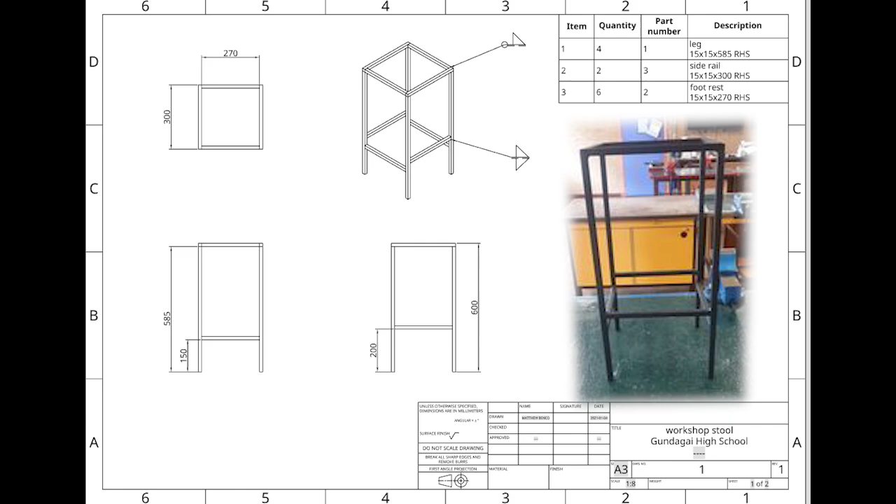The first thing you need to do is come over here to create, then hit document. You want to name this stool. This is the third time I've done this, so I'm going to make it stool 3.

So this is our drawing window, where we're going to create our parts to make the stool. The stool only has 3 parts: a leg, a footrest, and a side rail. We're going to start off doing the leg.

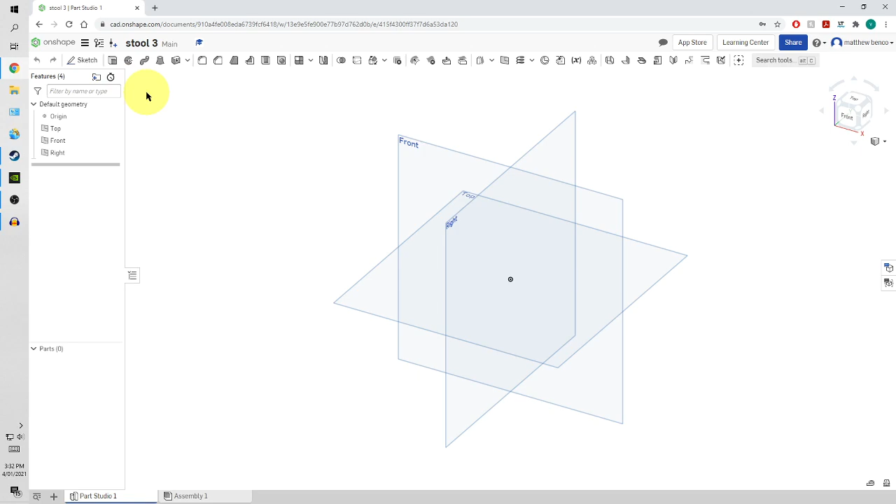We're going to go up here to sketch, then click on top, and look down on top like this. We go over here and use a center point rectangle, starting from the origin right here in the middle and drawing it out like this.

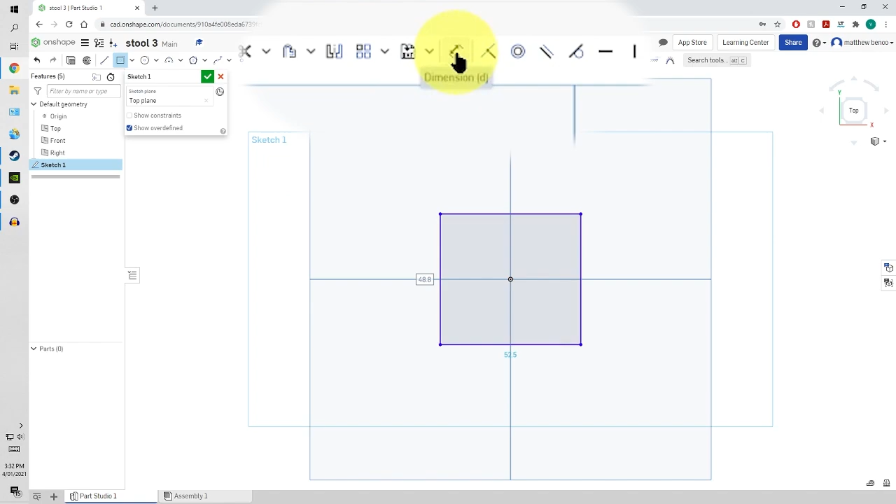We're going to go up here to dimensions, click, then click again. We're using 15 by 15 RHS, so we type 15 there. Click, click, 15 again. You can see how everything here has turned black, meaning it's all in the correct position and dimensioned back to this center point. Make sure everything is black with no blue sides. Click the big green tick and we have a square here.

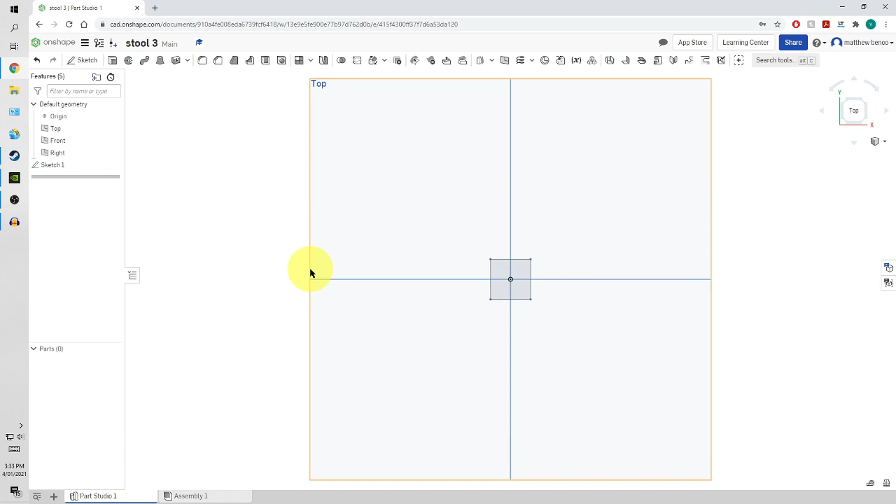Now that square is just 2D, like drawing a square on a piece of paper. But now we need to draw it out so it's an actual 3D leg. We come over here to extrude, then click on the part we want to extrude, and you can see it's starting to stick out a bit.

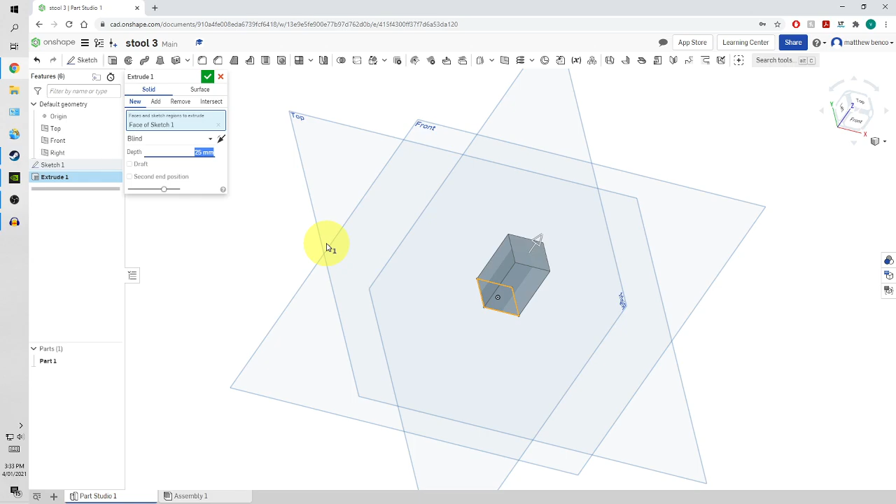Now if we look at our plans, we can see the overall size of our workshop stool is 600 mil. 600, take away 15 for the top rails, is 585. So that's how long we want our leg to be. See, it's nice and big.

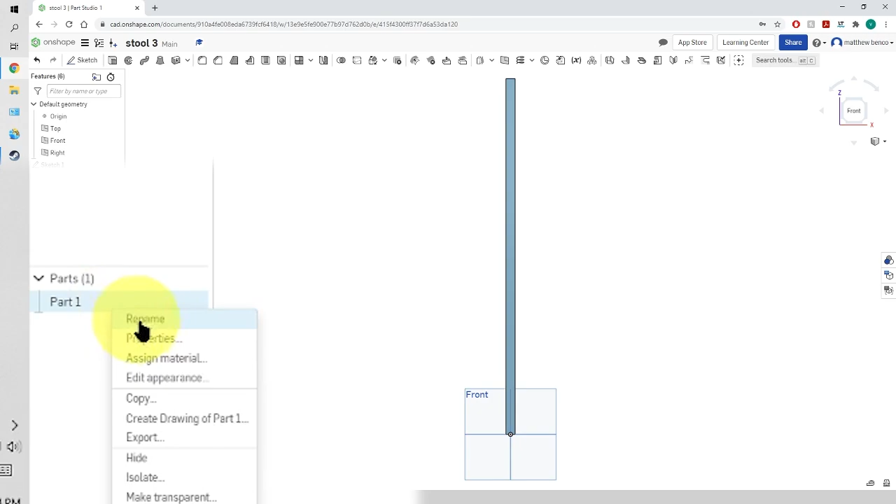We're going to come over here to part 1, over here in the parts menu, right click it, then click on properties. This little menu comes up, and we're going to call it a leg. In the description, we're also going to call it a leg, and we're also going to put in here 15x15x585 RHS. That'll help us out later on when we go do workshop drawings.

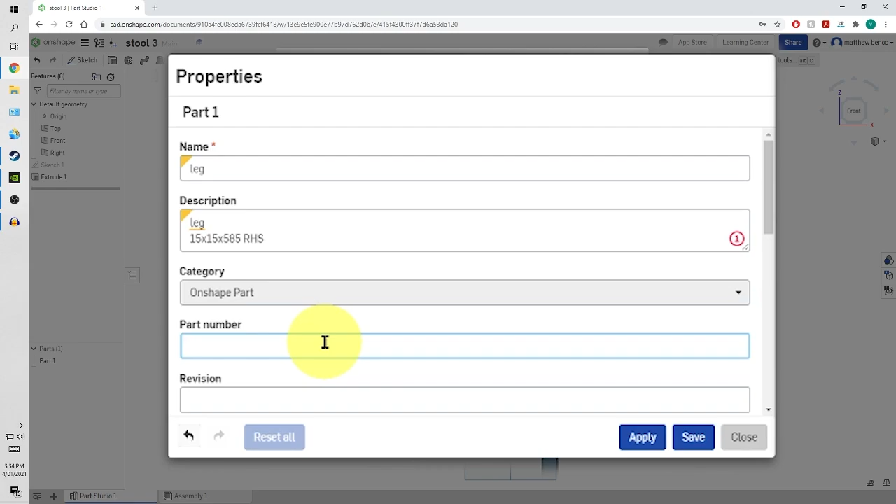And this is part number 1, so we're going to save that. You can see over here in the parts menu that it's renamed this to leg. Now I'm going to click on this little eye icon here, and that's going to hide that leg away so we don't see it anymore.

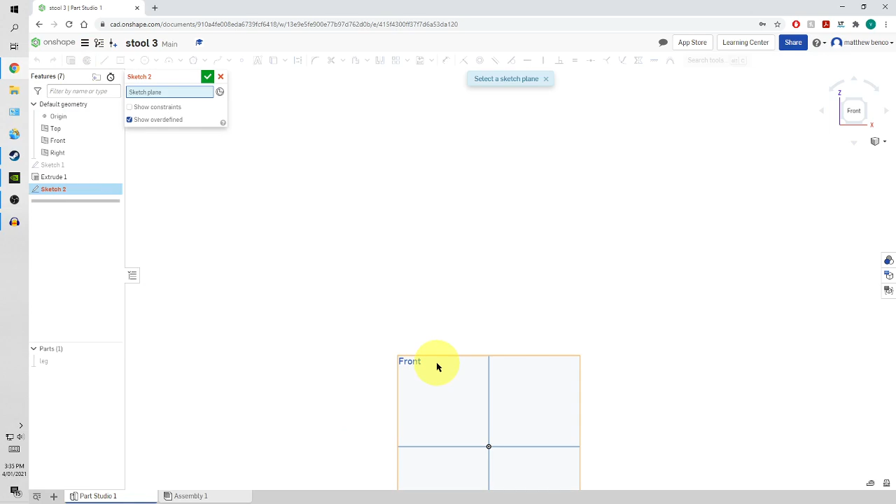Now what I'm going to do is a second sketch. I'm going to go to sketch, and click on front this time instead of top. I'm going to click over here, make sure we're focused in here, and again go to center point rectangle, click on the origin, and bring it out like this. Dimension, click, click, 15, click, click, 15.

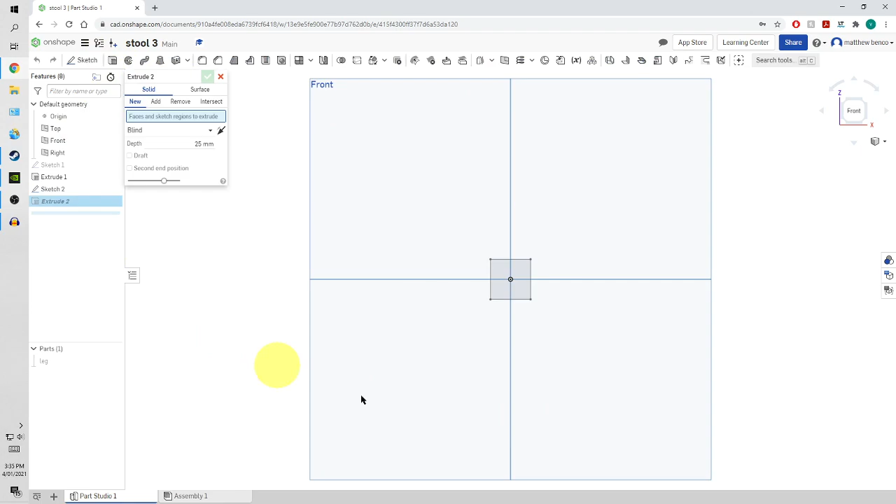We're going to extrude that now, and this is going to be our leg rest. If we look at our plans, the width of our workshop stool is 300, which means this leg rest needs to be 270 because it has 2 lengths of RHS on each side that are both 15 by 15, so that makes 30. So now we have a piece coming out that is 270 long.

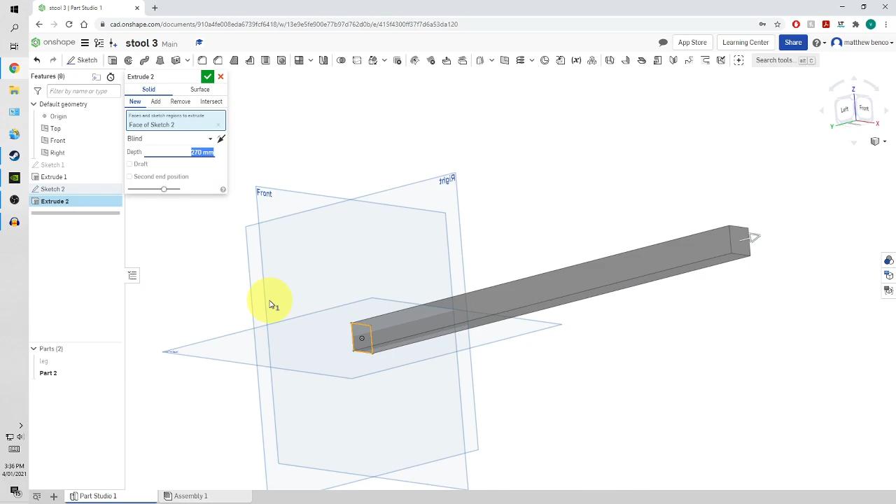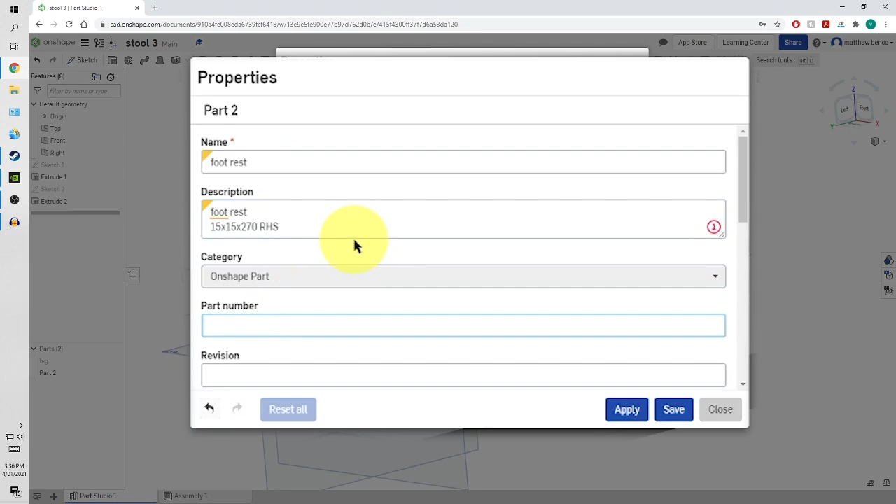We're going to hit that tick, go once again down here to properties, and name it footrest. We're going to put footrest in there as well. It's going to be 15 times 15 times 270 RHS. Part number 2. Save.

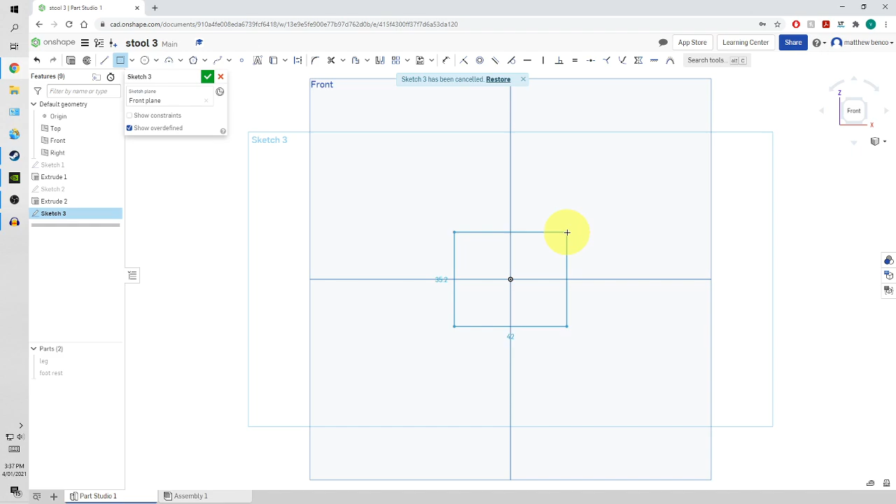We're going to click that little eye icon again and it's going to go away. We're going to go to sketch and go front, and then click on this thing here so we know it's focused on the front. Once again we're going to use the center point rectangle. Click, click, 15 by 15.

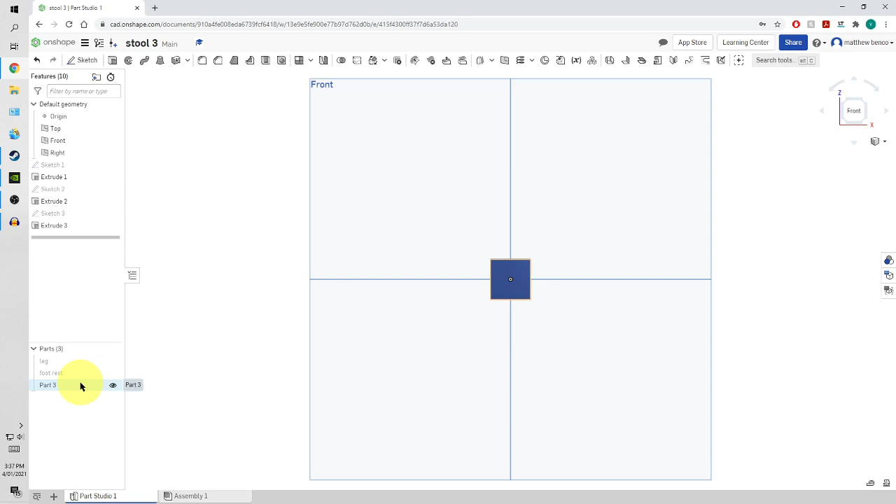And this one we're going to extrude by 300. Go over here, go to properties again, call it side rail, side rail again, 15 by 15 by 300 RHS, part number 3. And that's all we need to do for this section here.

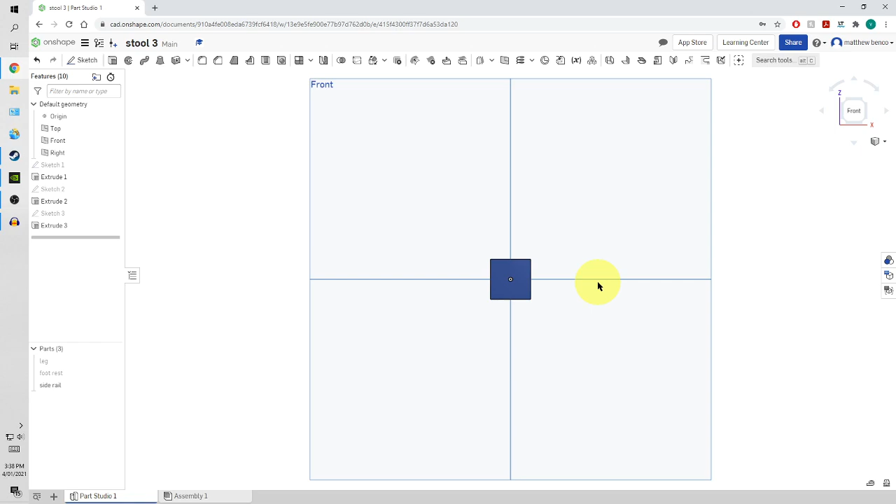What we're going to do now is move on to the assembly part down here. So we click on this assembly tab, and this is the place where we put our stool together. We're going to go over here to insert, get a leg, and put one leg in.

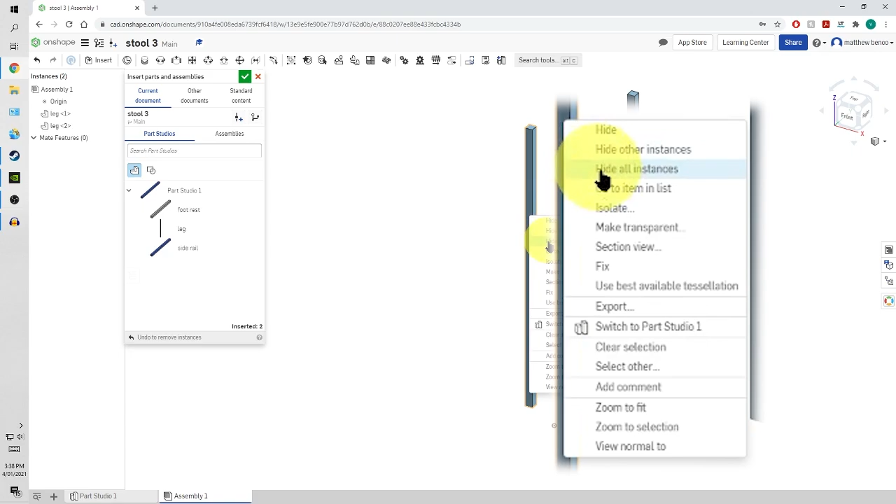We're going to put 2 legs in. Okay, we have now 2 legs. We're going to click on one of them, right click, and go down to where it says fix. That makes sure that this leg won't move anywhere randomly in this workspace. This creates a solid foundation to build the rest of our stool from.

Now we need to have one of these side rails. We're going to come over here to this Fastened Mate tool. It looks like a cylinder, so we're going to click on that one there.

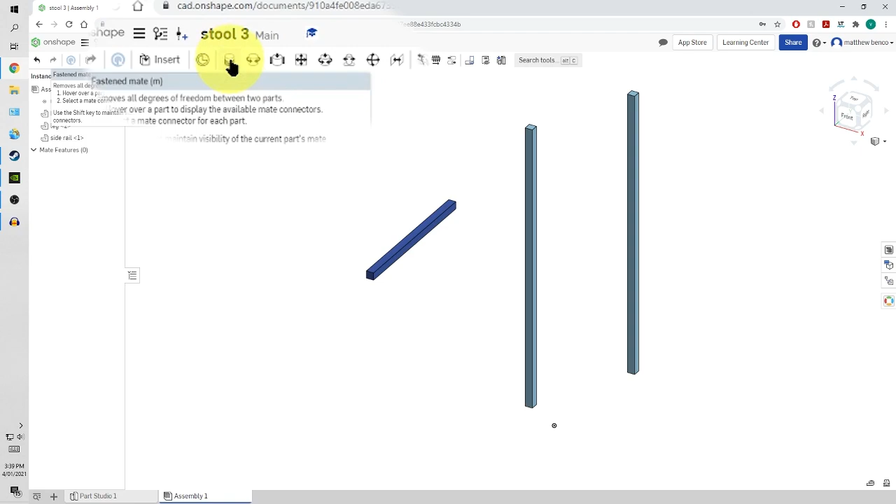We're going to zoom in to the top of the leg. When you zoom in, it zooms in towards the mouse cursor. So when you want to zoom in towards something, you need to put your mouse over where you want to go, then use the scroll wheel to zoom in.

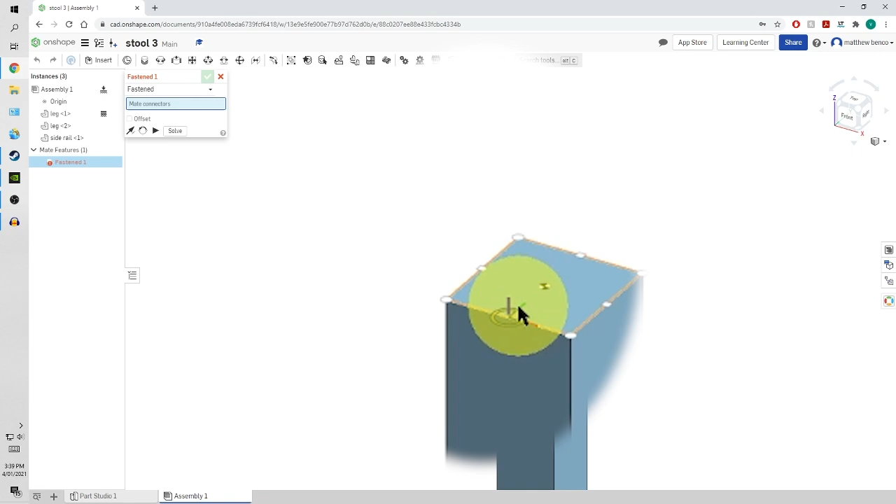We're going to click on the side here, making sure that all these little dots around here are there. That means that this surface is the one that's going to stick to the other one. So we click here, where that little disc is, that's going to be the join point of this thing. So we zoom back out.

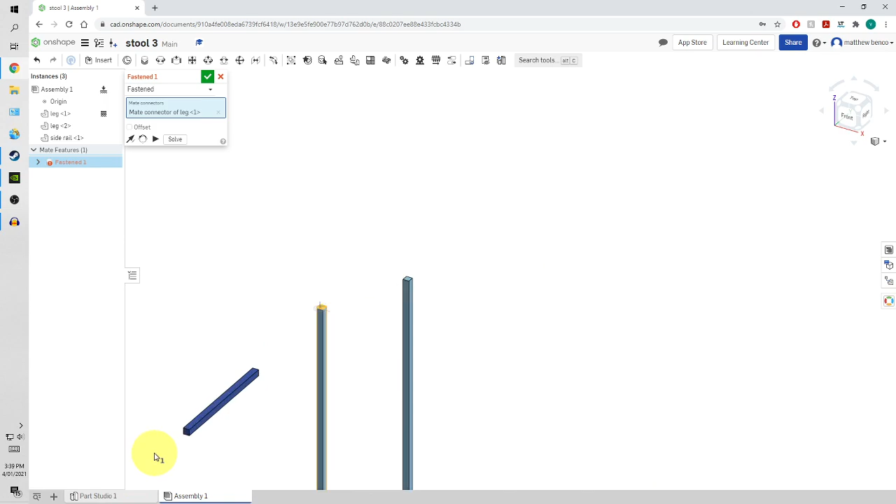We're going to zoom back in down here. I'm going to rotate so I'm looking at the underside. I'm going to click on this one here, and that's going to join those two just like that. Big green tick. So that's how we want it right now.

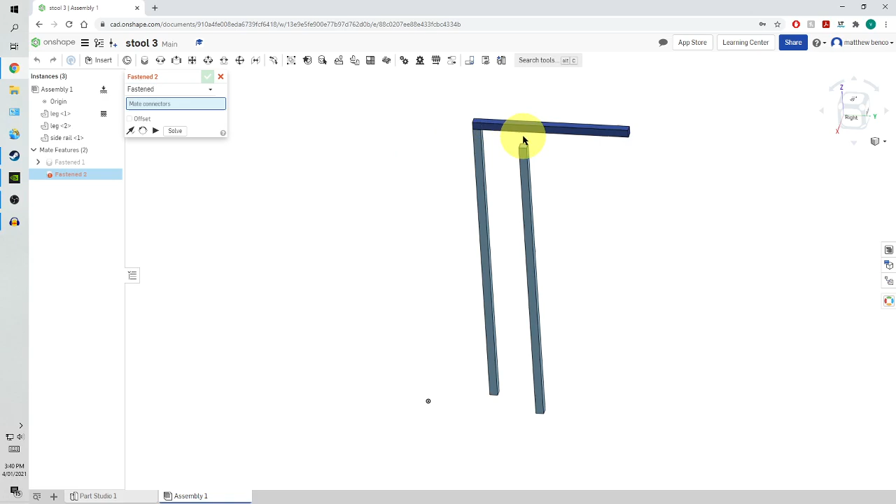After we've done that, it automatically gives us the same tool we're just using again. So we can now go and zoom in on top of this one. Click on the side, zoom back out, rotate around, zoom back in, and click there.

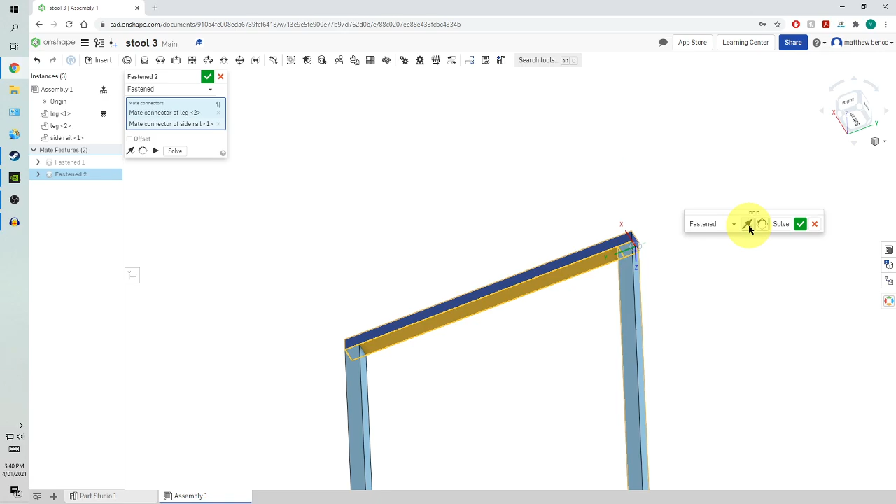If something goes wrong and this isn't in the right position, you can use these 2 tools here to flip it around in the right way. See, this one just makes it go in the opposite direction, and this one will rotate it around.

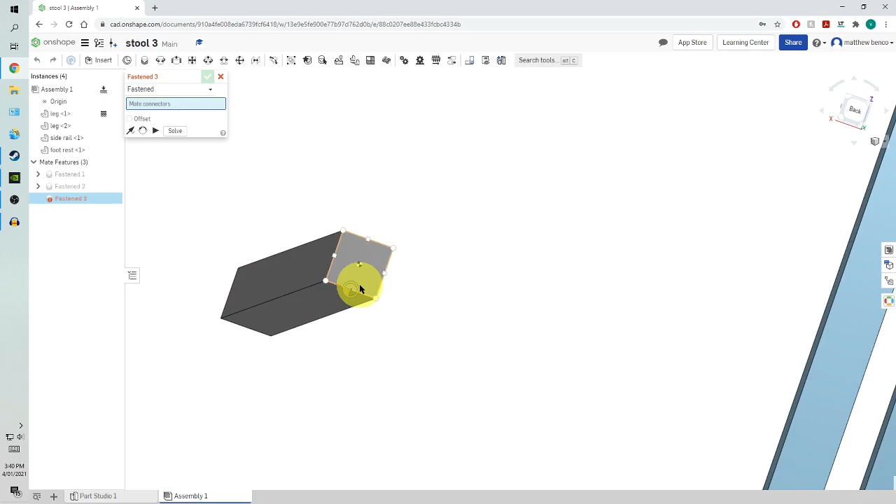So what we need to do now is insert a footrest. Now this footrest, we're going to use the Fastened Mate tool. Come in on the end of the footrest, making sure all the dots are on this side. I'm going to click there. Rotate, zoom in again, and click there.

Now, this isn't a very good place for a footrest. What we need to do is come over here, and there's this little checkbox that we need to click. Click on that, and it's going to have all these offsets here. As you can see, there's this little compass that's shown up.

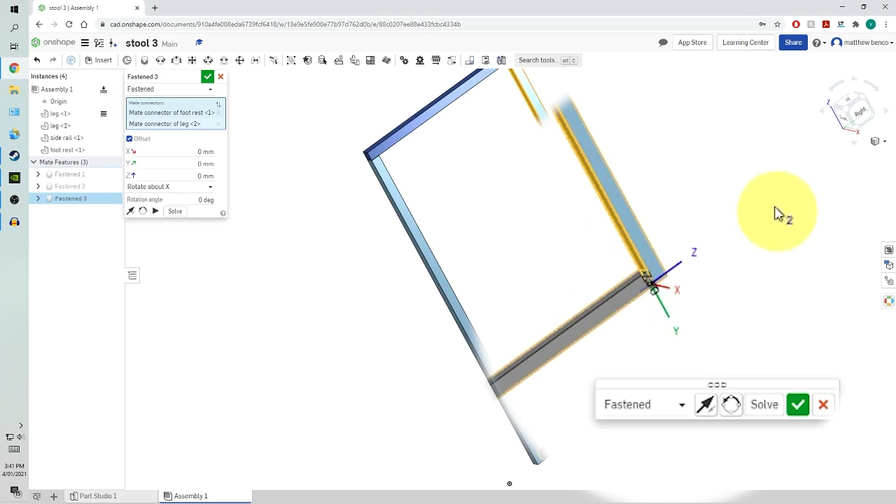Now, Y is the one that's going up and down this thing here. Now, this can change, so you need to have a look and make sure you're going on the right axis. So I'm going to go here to Y, and I'm going to put in -200 because the green one is facing down and I want it to go up. Putting in the negative means it goes up like that.

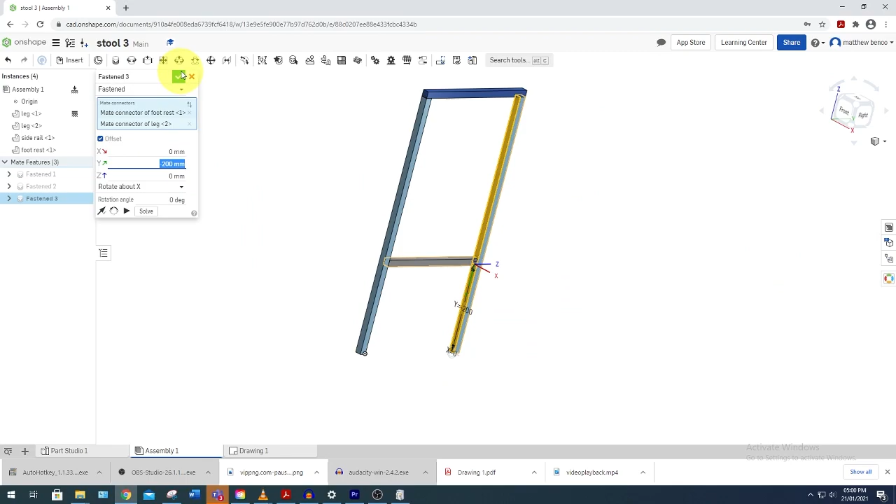So now we have one side of our stool. What we're going to do now is insert 4 of these footrests. So if we click on this 4 times, we're going to get 4 instances of this footrest. They're all on top of each other, but that doesn't matter at the moment.

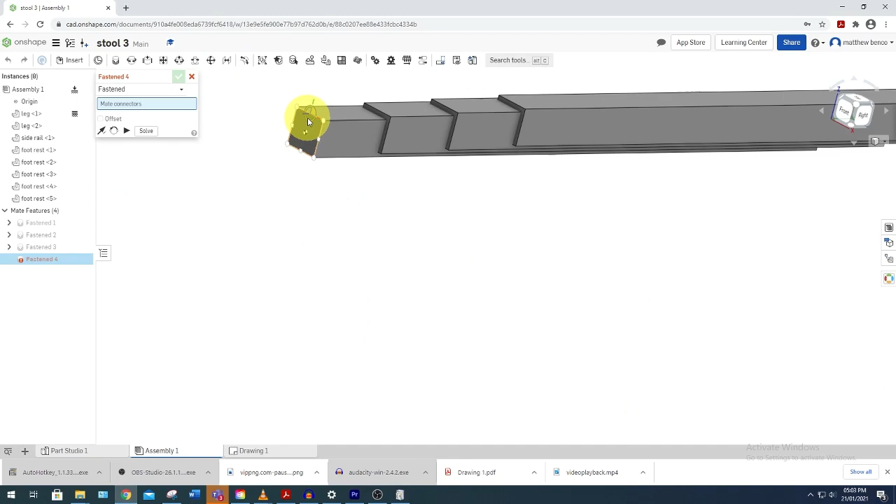Go over here to Fasten Mate. Zoom in again on the end. Click. Zoom in up here. Click. So you can see that mine has joined strangely.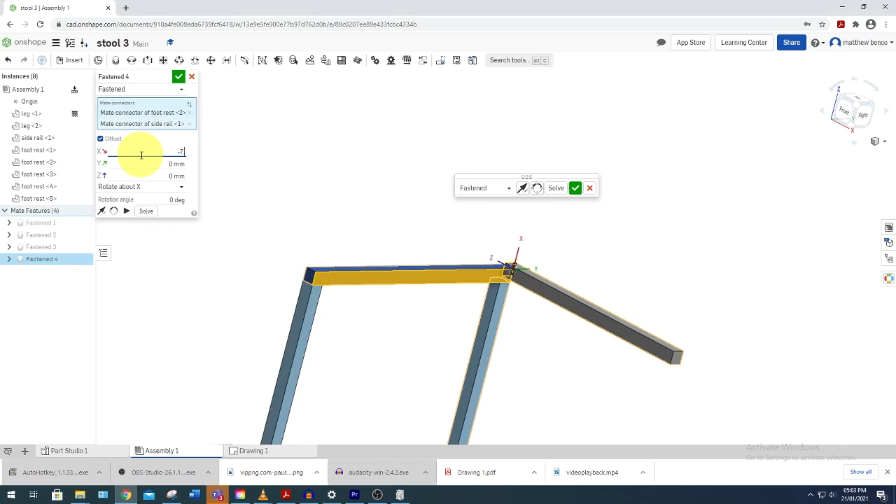I'm going to click on that, and then I'll rotate it around. So you can see because I chose the middle of this one, it's gone to the middle of this one. So I'm going to use the offset tool again, and I'm going to move it 7.5, and that's going to put it in there.

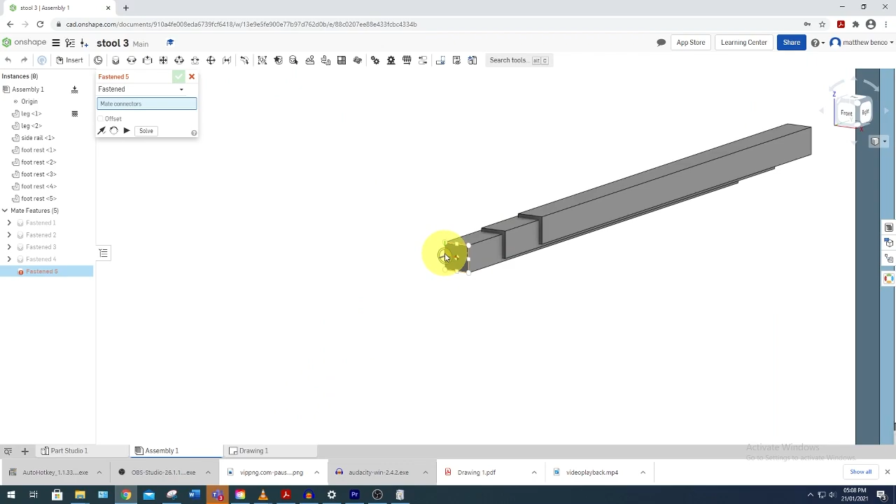We don't want to have to do that all the time, so we want to try and think of which space is going to be the best place to join this thing. So if we come down here and we join with that corner there, and then we come over here and join with that corner, they've joined together like that, and we don't have to offset it.

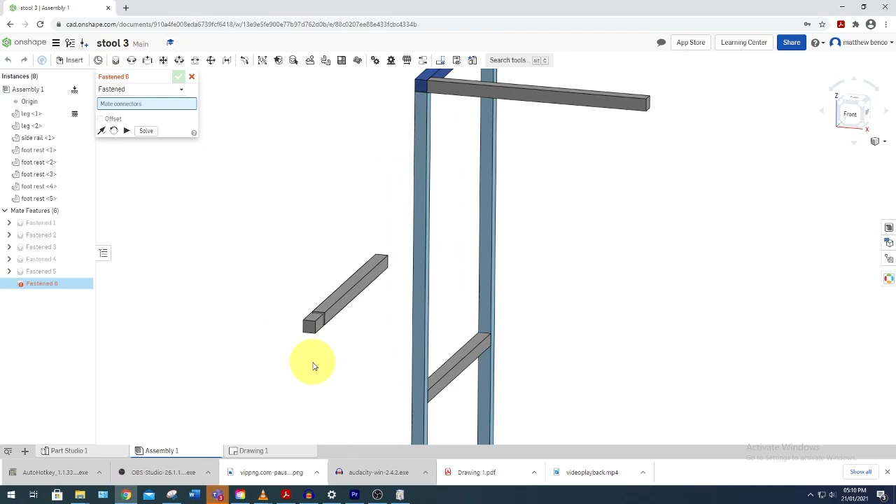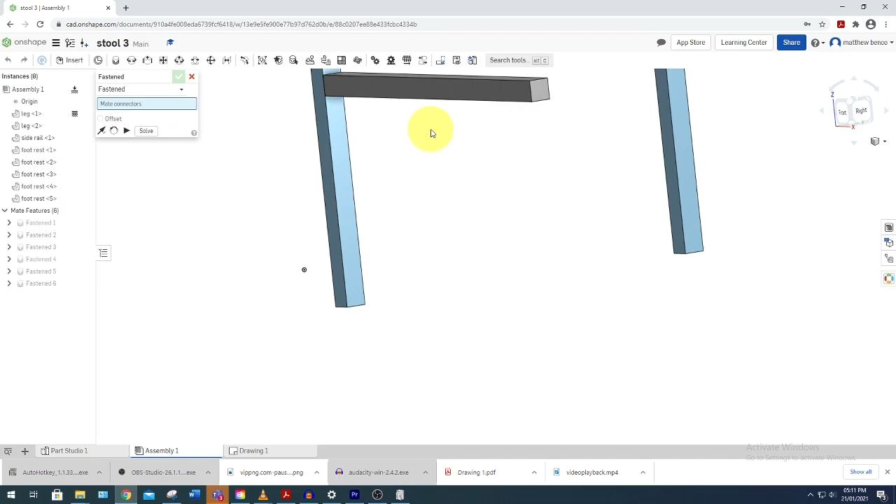We're going to join this one. This one we need to offset. It needs to go up 150. We're going to do the same thing to this one here.

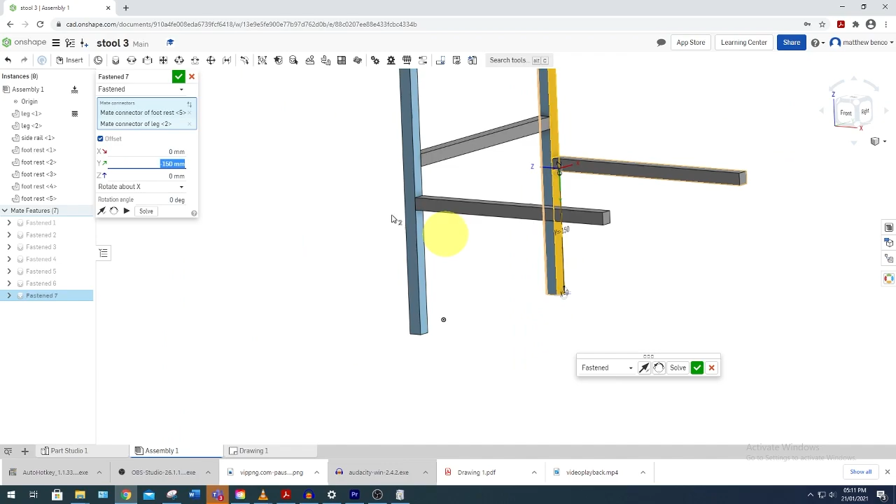We have our one side there, and we have the bits in the middle. Now we just need to put on the other side over here. We're going to insert now 2 legs, a side rail, and a footrest.

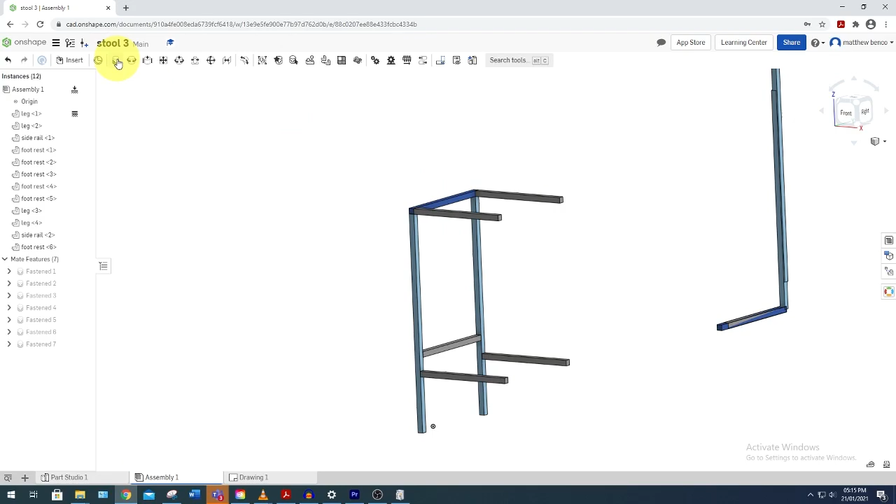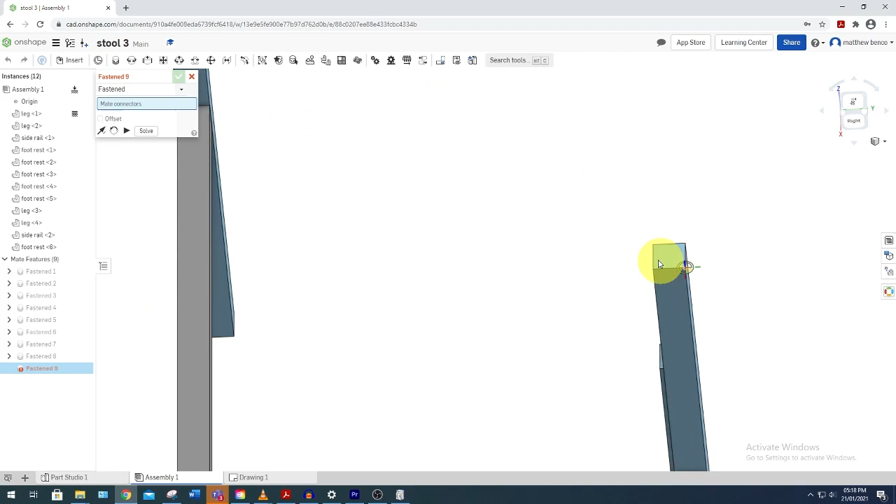Use the fasten mate tool, and we're going to start with the side rail. I'm going to come in here, click there, zoom out, zoom back in, click there. Now we're going to come back over onto the leg. Click on the corner. Rotate underneath. Click on the corner again.

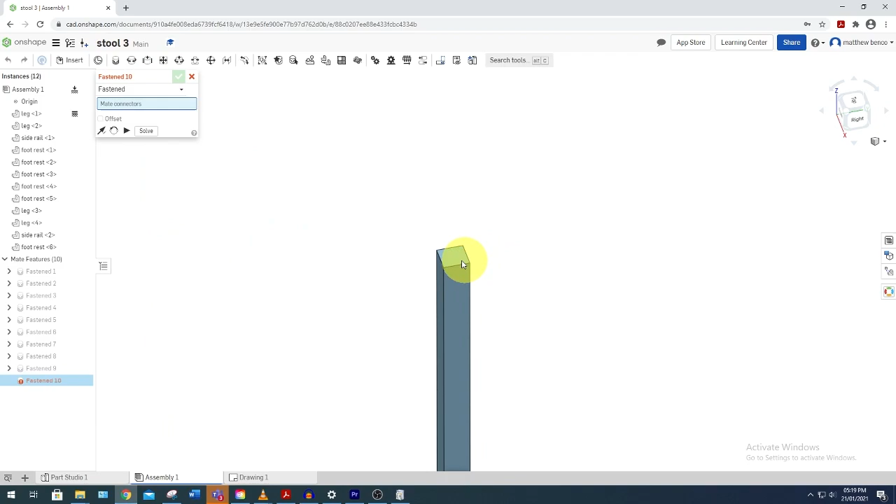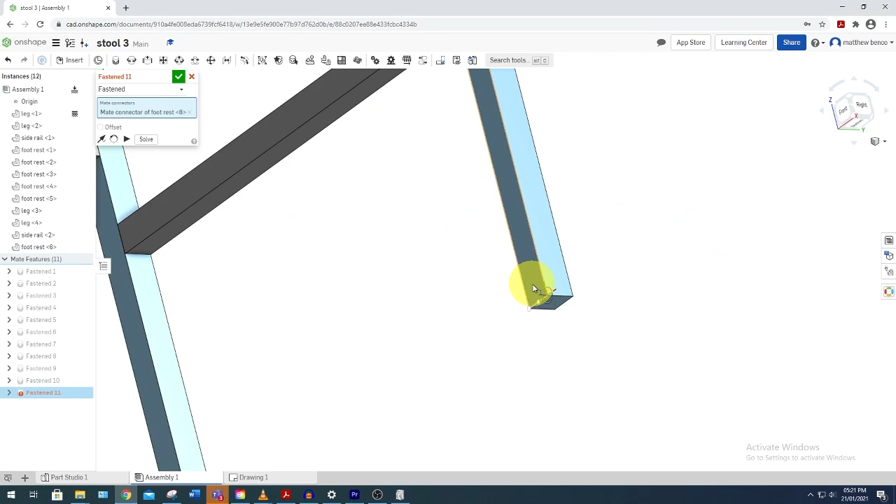And we do the same thing for this side. On the corner, and the corner again. The last thing we need to do is this one here. Now this one here we need to offset. It needs to be -200.

And that is our stool all put together.

What we need to do now is add in another tab down the bottom for where we put our workshop drawing in. So we go here to this big plus button, click on that, and go up to where it says create drawing. This little list is going to come down here.

The template we need to use is ISO A3. Clicking on show OnShape drawing templates shows all the ones available. This ANSI one is the American one. If we go to international standard, we want to go there and select A3. We're going to use that one.

This means everything we put in here is going to be the correct drawing standard. Now to get this to be Australian standard, we need to change this from first angle to third angle.

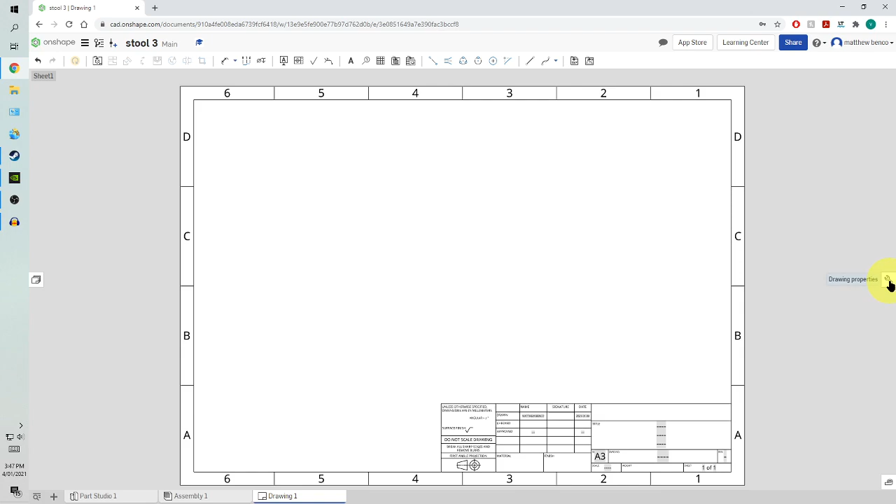So we go over to this little spanner symbol where it says drawing properties, click on that, then click on the symbol up top where it says views, come down to the first drop down menu and hit third angle.

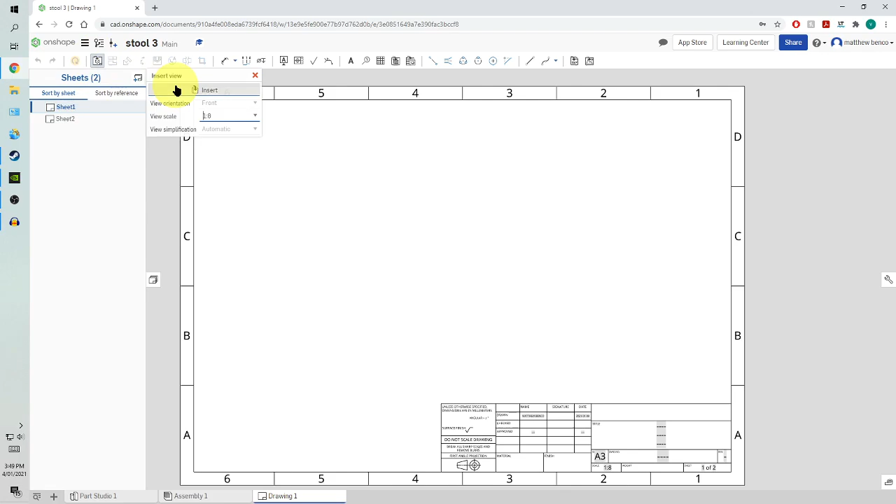Once you've got that sorted out, we come over to where it says insert view, click there, then hit insert. We go to where it says assemblies, and we have our assembly one where we put that stool together. You just click that down there, and it automatically picks up the projection tool.

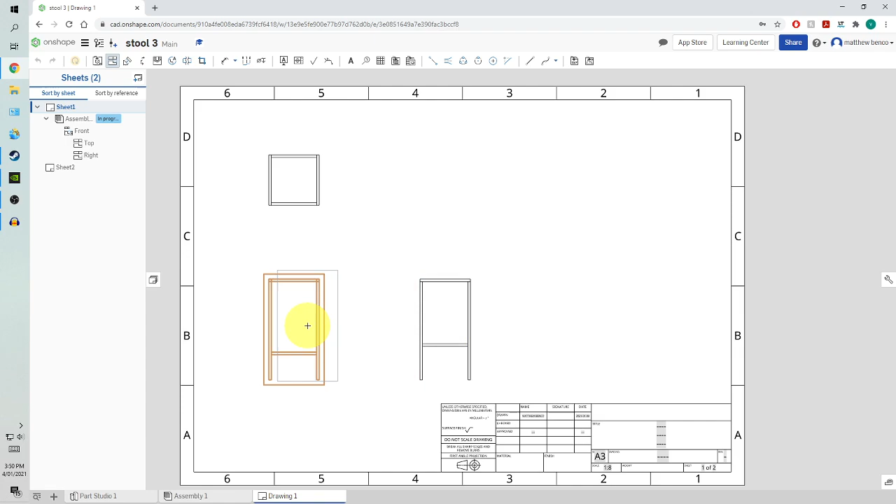As you pull it up like this, you'll get your top view. Click on it again, pull it out to the side, you'll get your side view. Click on it again and draw it out at this angle and you'll get your isometric view. Those are the four views we need: front, top, side, isometric.

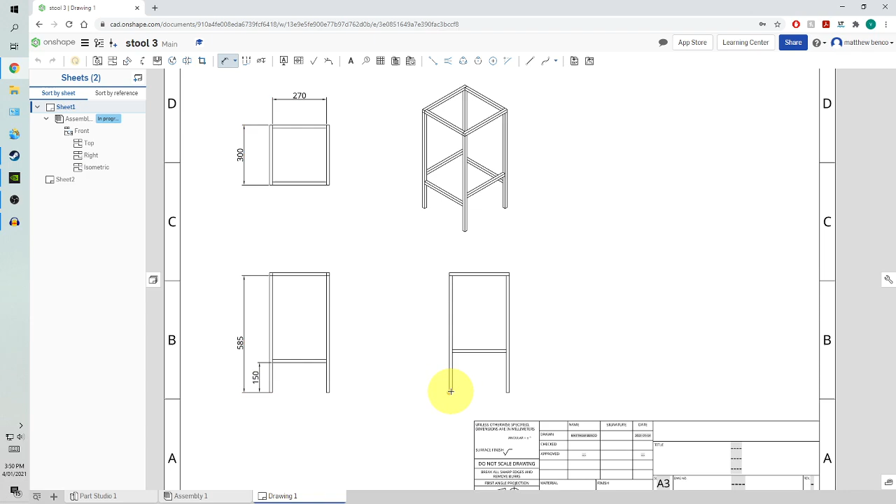We're going to put in our dimensions, using the same tool as before. We click on this, draw it out, making sure it's a sensible distance out. Click on this side here, draw it out. This side here. We need to know how big that side is there. And this one here. Now the trick with dimensioning is to have the minimum amount of dimensions possible.

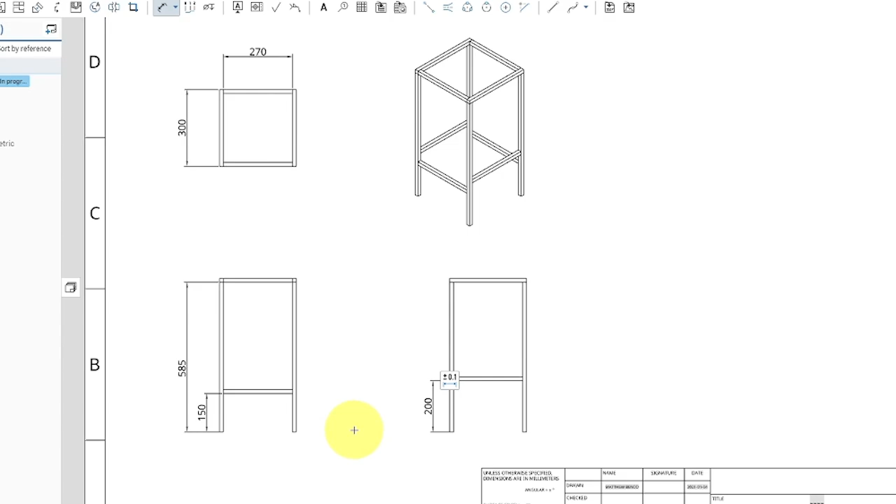We need just these few dimensions here, and that's all the dimensioning we need, because we can see that that's 270. That means that one's 270, that one's 270, and that one's 270. That one's 300, and that one relates to this one over here, so we know that one's 300 too, so we don't need to have the 300 over here as well. We have the height of that footrail, and the height of this footrail.

Go to this tool here, it's called BOM table. We click on that, and then click up on the side here. What this is going to do is generate a table of all the parts we've used.

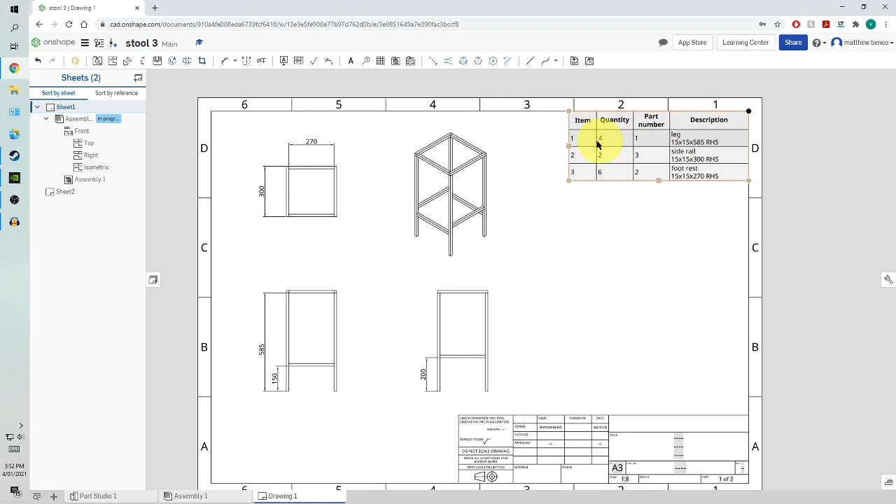We just need to change this so that everything looks nice. You can see that all the information we put into the properties before has been put into this list here. We're going to come down here, double click, and call it Workshop Stool.

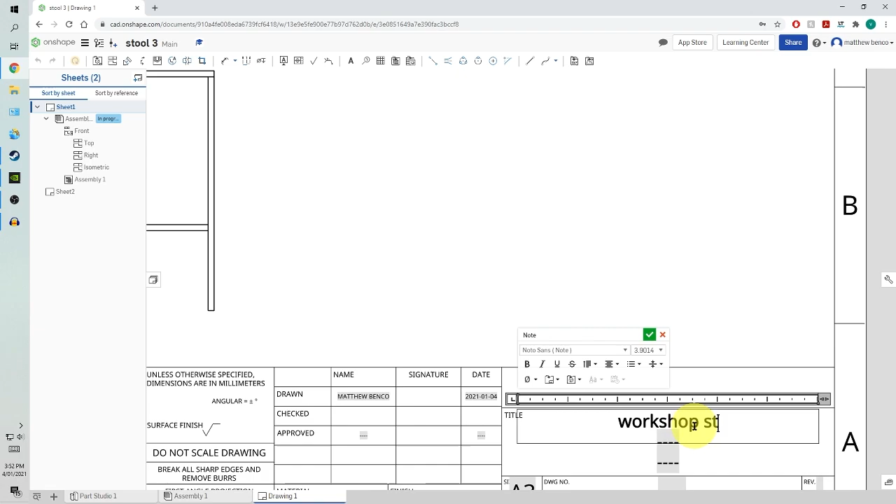We're going to go one line down, double click on the next line, and put in here Gundagai High School. You can see in this list it's already put your name in there - see, it's my wonderful name there - and it's also put the date in here, so we don't need to put any of those in.

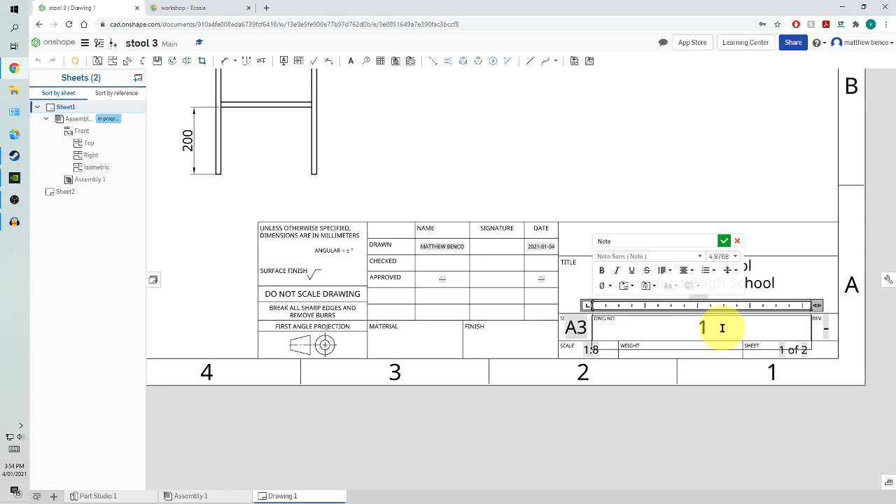This is drawing number 1. This is also number 1. This is version.

There's a few things we can put in here to make it easier for somebody to make something from this. So we go over here to welding symbols. We're going to put in a fillet weld, which is right there, that triangle, and we're going to click that little all-around thing.

We're just going to click where we know we need to put that in. If I put a symbol there that says fillet weld all the way around, we know we're going to need to go there, there, there, and there with a fillet weld. We don't need to mark every single one.

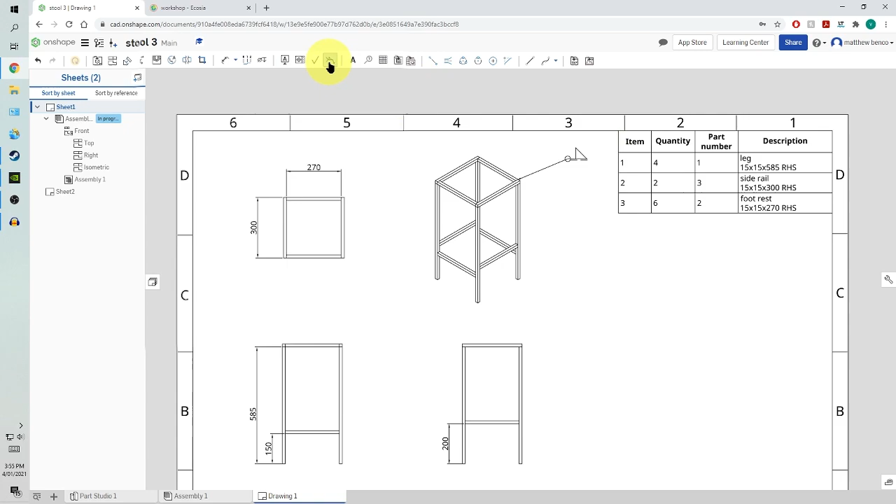For this welding symbol, we're going to say fillet weld, and then on the bottom side, we're going to say fillet weld, and put that down here. This means you're doing a fillet weld on each side of this, so it'd be the top and bottom of that, so you'd have no welds on the front sides. And that's all you need to do.

And so this is now finished. So all we need to do now is export this out of this program so we can have it in a format that we can hand in or print out.

So we go over here to these three little lines, usually called a hamburger for some reason. We go here to print. What this is going to do is spit out a PDF called drawing something.

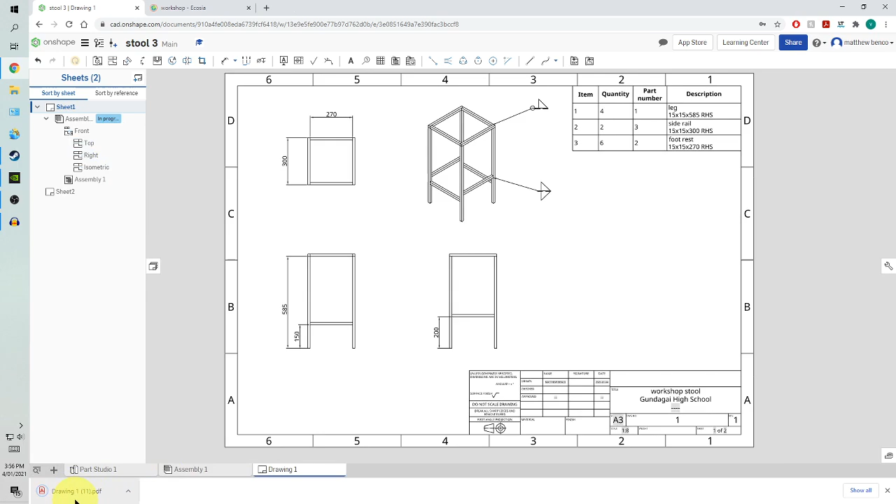If we open this up, we're going to have all that information we put in there in a nice little thing. This document we're able to upload wherever you need to, or print it out, or anything else we need to do. And that's all we need to do for this drawing.

I'm in my mum's car. Broom, broom. Get out of my car!